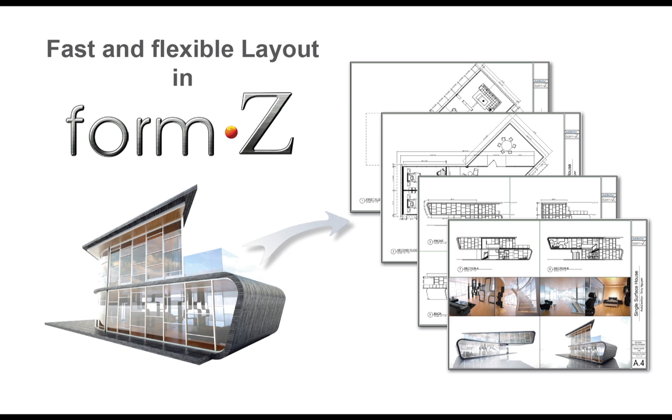In this presentation today, we'll be looking at some of the new and improved 2D layout features in Form•Z 7, which allow you to quickly and easily generate a set of 2D layout documents from your 3D models. We'll begin with this existing 3D design concept created by Tony Nguyen. This project, called the Single Surface House, consists of a single curving form that transitions from floor to ceiling while overlapping and converging between the different elevations. This 3D model should make a great example for highlighting the powerful 2D layout features in Form•Z.

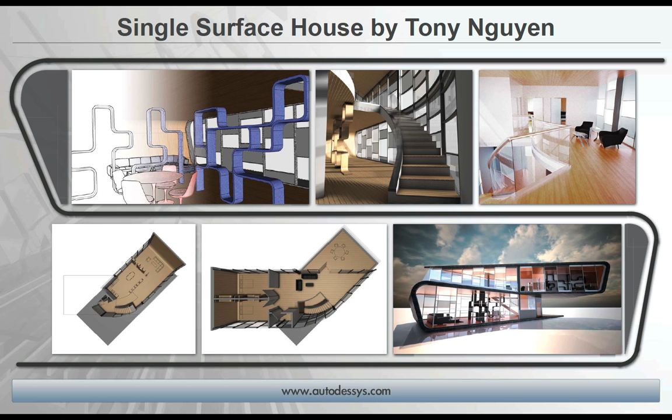It should be mentioned that your 2D layout can be linked to your 3D model, so any changes to your model are automatically updated in your layout, and your associative dimensions automatically update as your design changes. Form•Z can also automatically generate hatch patterns when you create floor plans and cross sections, saving you valuable time. Layout lets you fully annotate your design with line styles, line weights, images, graphics, and anything else you need for a complete set of 2D layout documents.

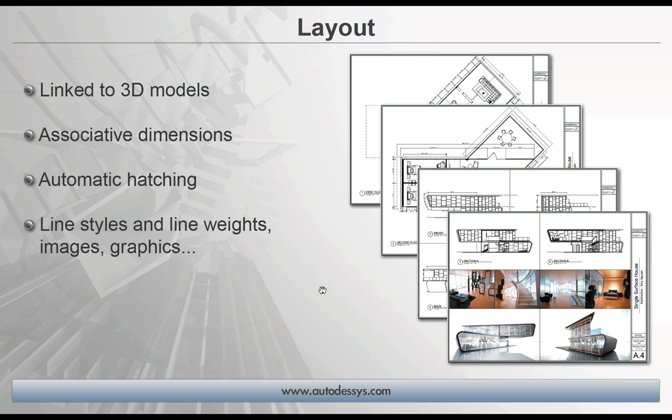So with that, let's launch Form•Z and see for yourself how easy it is to create your own 2D layout in Form•Z. We will switch over to Form•Z, and here is Tony's project, all modeled and rendered inside of Form•Z. Now, our case here is to show how easy it is to take this 3D model and convert it into a set of 2D layout documents. And here's how the process works.

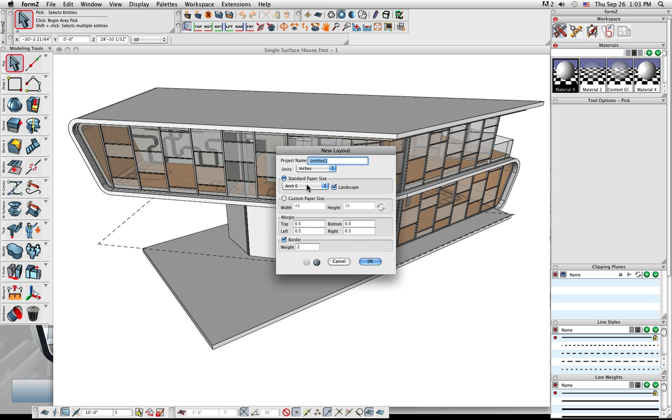Simply go to the File pull-down menu and choose the New Layout Project option. First thing you're going to do is select the size of paper that you want. There are all sorts of industry standard paper sizes you can choose from. Let's choose Architectural E size. Of course you can do metric or English systems. Click the OK button, and that starts a brand new project.

Here we have our layout space. This is a 2D world, and here's our sheet of paper. If we were to measure that sheet of paper using the measure tool, we'll see that since we chose the Architectural E size, it's 48 inches by 36 inches. There's our sheet of paper that we're going to begin to lay things out on.

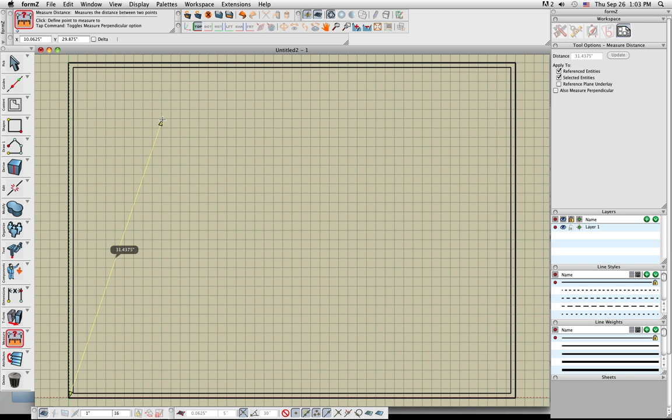Now, when we save this, you can see that if I were to save the project right now, this is a separate file which is saved as a .fml file. I can give it a name, such as, how about Single Surface House Layout. So this will be saved as a separate project file.

All right, now how do we get content in here? Well, there's all sorts of drawing tools to add lines, splines, arcs. You can add text and dimensions and all that stuff. Or you can use the content tools, which allows us to add content from 3D models into our layout space.

Let's try the frame tool. With that, we simply select the frame tool and create a frame boundary. Inside that frame boundary, we're going to link that or sync it to a 3D model. Then we can see views of a 3D model inside of that frame.

So let's load a 3D model. Let's take Tony's model here. Here's the FMZ file for that right there. Click open. And there it is.

Now, what do we want to see in that frame? Well, we can change the view. We can use one of the views that are already saved in that 3D file, or we can use some of these standard views - top, front, back, whatever we want. Let's say we want a front elevation, so I'm going to choose the front elevation option.

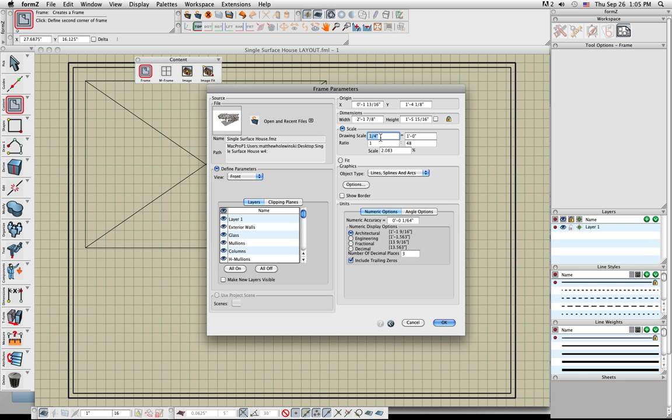We can set a scale. Let's make that 1/4 inch equals a foot scale. Click the OK button, and there we go. We now have a 2D flat representation of a front elevation of that 3D model, and it is linked with that model. So we have lines, splines, and arcs here, all in this 2D world.

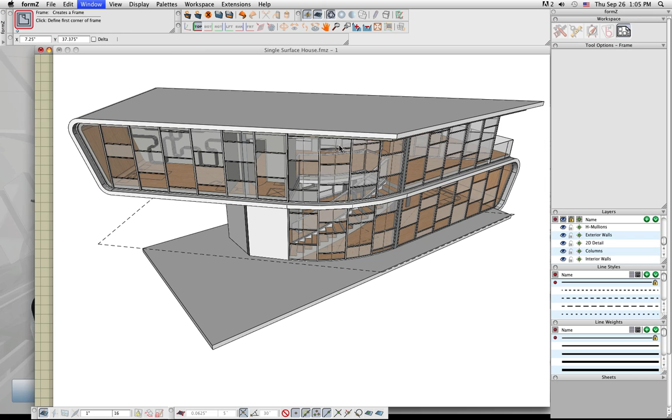Now, just to show that this is linked with the 3D model, let's make some changes to that model and see what happens in our layout space. So we go back to our FMZ file, which is our 3D model, and let's change something on here. Let's say we want to add some additional space to the second story in this room over here.

So let's make a quick modification to that. I'll go to a front view, and using the pick tool, I'll go to wireframe for just a second and window pick all the points that are in that part of our model. Now, how far do I want to move these?

Let's measure this and see what distance it is between the mullions here. And you can see if I click from here to here, it looks like it's about 14 foot 2 inches between those. So let's try that.

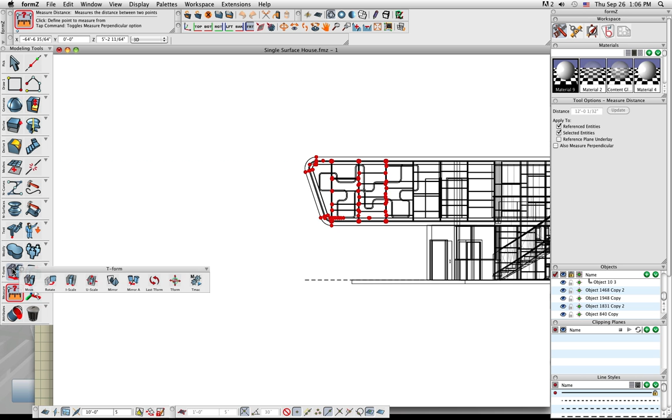Let's do a move. I'm just moving all those points, drag it over, type in 14 foot 2 inches. And there, all those points move 14 feet and 2 inches to the left. You can see everything moves, all the points move, and all the geometry reconstructs to make that change to that model. Pretty easy, huh?

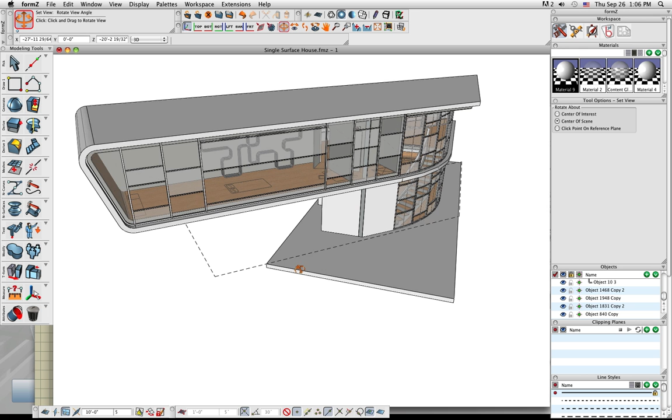All right, so let's zoom and look at this. That looks pretty good, except inside the curtain wall here, we've stretched all the glass panes and the mullions that are in there. So let's make another quick adjustment to that.

So I'll delete those mullions, which were stretched from moving those points around. So let's get rid of those.

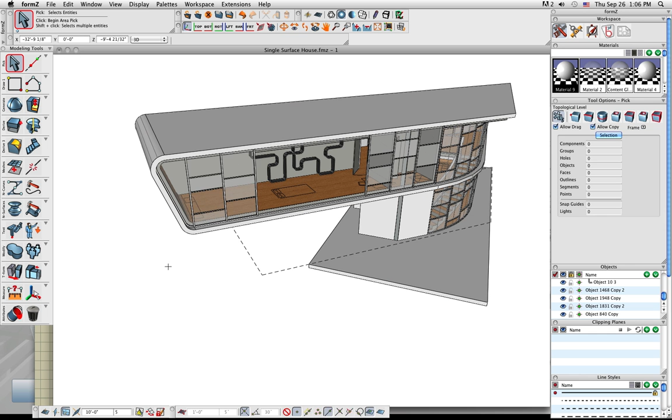And we'll just copy these mullions over here to sort of fill in that area to finish off that extended curtain wall. So I will select all of those, hold the shift key to deselect this one on the left, and then using the move tool I can do a repeat copy.

So I'll snap to the endpoint here, snap to the endpoint there, and there's our distance, and then every time I click it's going to repeat that copy operation. So there, we filled it in with our changes, and let's save our project file now.

So let's do a file save. We're saving the 3D model, which is the FMZ file. Do a file save, and let's go back to our 2D layout and see what happens.

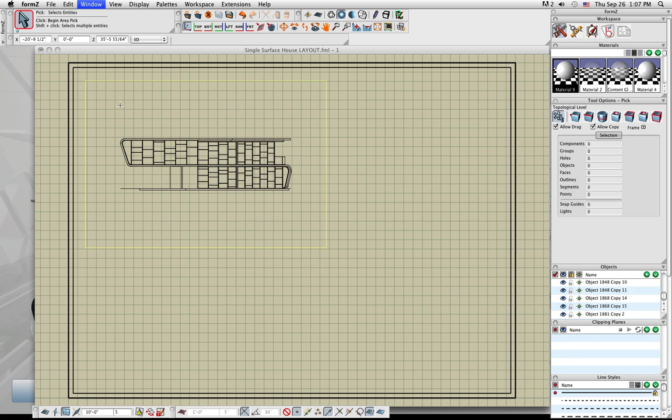So let's go to our layout file, and there we go. As soon as we bring that file back, it flags it and says, hey, that 3D model has changed. And so if you click the OK button, it'll automatically update the file for you.

And you can see that all the links will be listed here. We just have one frame, so there's one link. We can turn that sync option off if you don't want this to update with our changes, but we do want it to update, so we'll leave the check mark there.

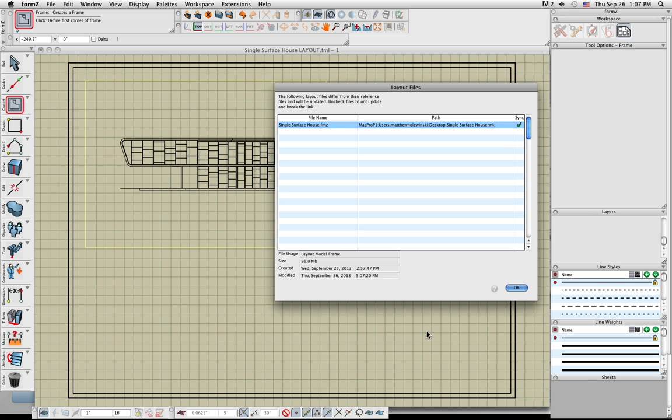And then when we click the OK button, you can see that the content, the frame content, will automatically update as that 3D model changes.

All right, so that's one way to add content into our sheets of paper here. We can also add graphic image data.

If you look at the content tools, you'll see that there's also a place image tool. So we have all sorts of rendered images that Tony did, both in the Render Zone plugin and in the Maxwell Render plugin. And let's see if we can find those.

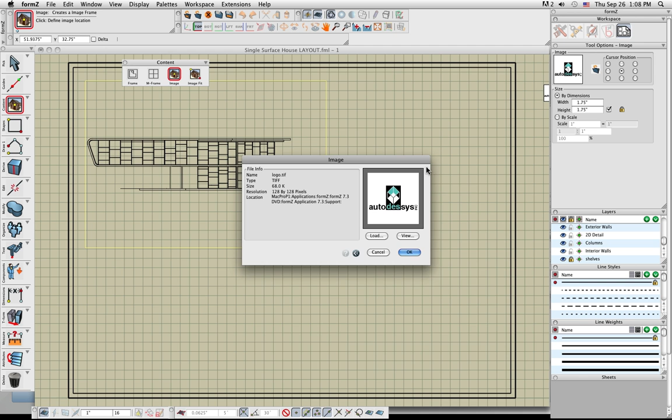I'll just say load. Any pixel image format will work. So here's some images that he rendered. Open those up, and there, we can place them right in the scene.

Now they're pretty small. We can give it any size. Just go to tool options over here on the right. Let's give it the size that we want, and we can place that graphical data inside of our layout space.

Pretty easy. All right. You can add additional sheets of paper to our layout. Look in the lower right-hand corner. There's a Sheets palette. Let's expand that.

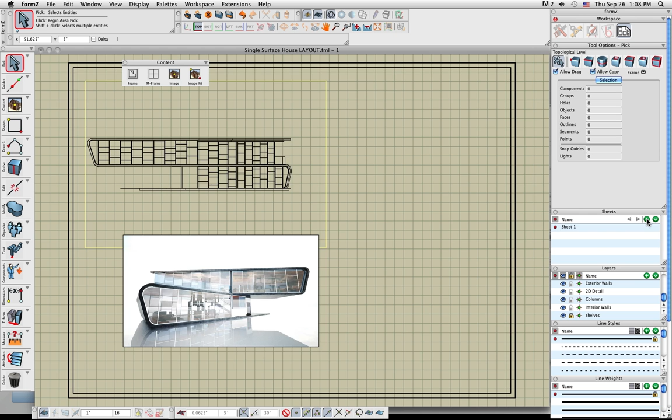There's one sheet of paper. Click the green plus button, and we add another sheet of paper. And we zoom out a little bit. You can see now there's two sheets.

Okay, let's click on sheet 2 and zoom into that one. Let's do a series of elevation views now. Now, to really speed up the layout process, there's a multi-frame tool, which allows us to lay out multiple frames simultaneously. So I will define one single boundary, and inside that boundary, I can lay out multiple frames.

So we can choose the layout options here, 2x2, 1x3, 3x3, as many as we want. Now, let's choose what we want in each of those frames. We'll have a front elevation in this one.

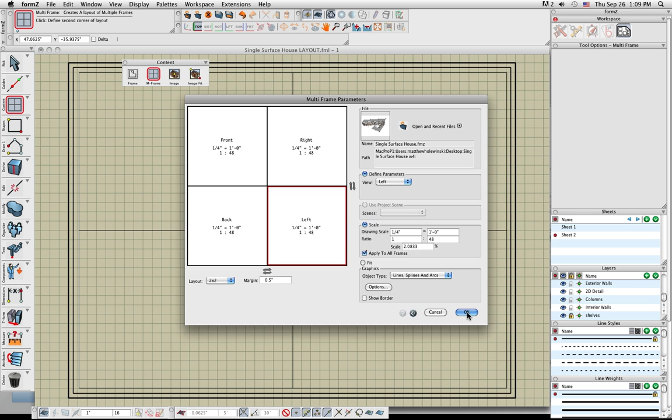Click on this one, we'll make that the back elevation, and we'll leave this as right and left. For the scale, we can set each of the scales separately for each of those, or just apply one scale for all of them. Once that's set, click the OK button, and off it goes. It'll actually generate multiple frames for you, so that'll help speed up that layout process.

Now, looking at these elevations, I see we still have our changes in there. So I'm going to go back and change that model back to the way he had it. Let's go ahead and update that. Let's go back to our 3D model, and I'm going to undo the changes that I made to his model. Let's go back, undo a few steps. There we go. So now we're back to the original model that was there.

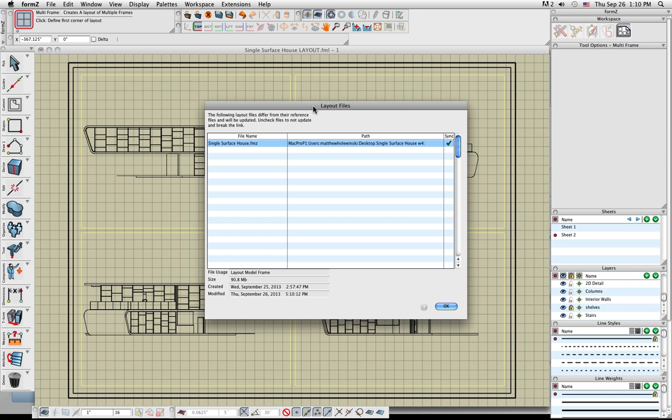And I'll resave the file. Let's go back to our layout space, and we'll see that that should automatically update for us. Once again, as we go back into that project file, it recognizes that there is a change to that 3D model, and it'll prompt us to accept those changes if we want. So click OK, and you'll see once again we'll automatically sync our 2D layout with our 3D model. So now all of our frames are set back to the original model. There we go. All right.

Next, let's create some floor plans. There's all sorts of different ways that we can do floor plans and cross sections of our 3D model.

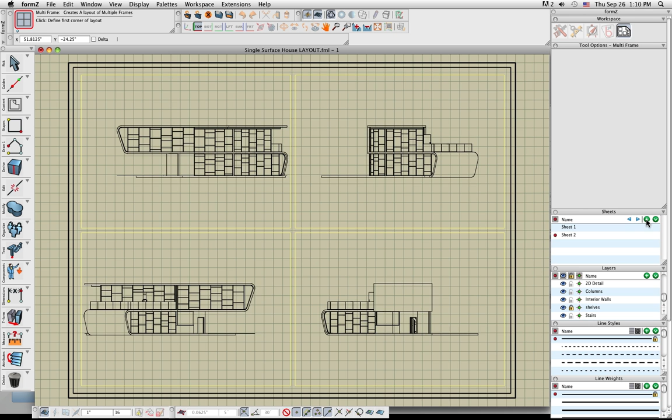Let's add an additional sheet. Click the green plus button. Here's our third sheet of paper. I'm going to use the frame tool, and I'm going to make one large frame that takes up this whole sheet of paper. We'll use that for our first floor plan, and we'll use the same model. Now, I should mention that you can link different 3D models inside your layout space, but we're just going to use the same model here.

Let's do the floor plan option. So instead of a view -- front, right, back -- use the floor plan option and give it an elevation. Let's give it 5 feet. Okay, let's give it a larger scale. Instead of a 1/4 inch scale, let's make that 1/2 inch equals a foot. Click the OK button, and there's our first floor plan.

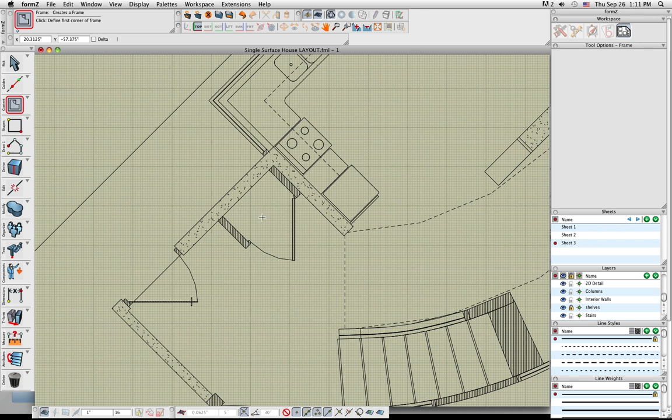Now, notice I didn't have to do anything in the 3D model. I can just tell it where I want to cut the cross section, and it'll automatically generate a 2D flat layout first floor plan, which consists of a series of flat 2D lines, splines, and arcs. Also notice that hatching and line styles are automatically carried over from the 3D model, so the cross section automatically created those hatch patterns for me. That's a real time saver. And all the line style information I added in the 3D model is also incorporated in these layout frames. I'll talk more about this hatching stuff in just a little bit.

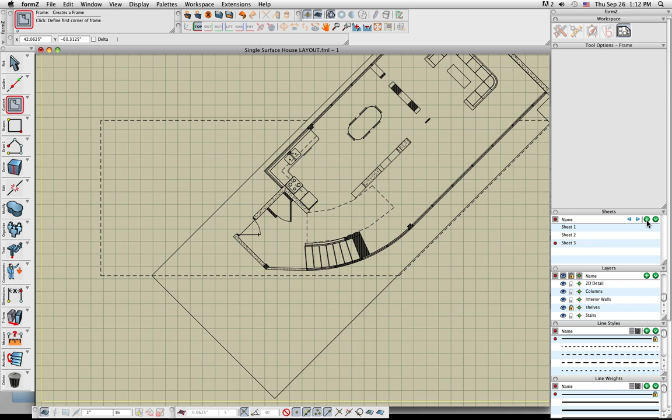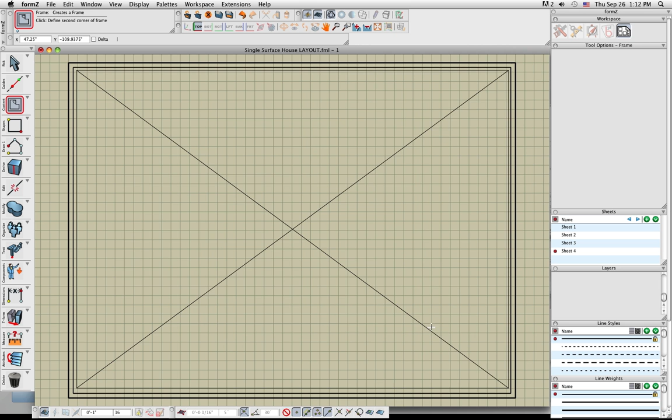Before we do that though, let's create the second story floor plan. I'll click the green plus button, add another sheet of paper, and let's do another frame. Let's use pretty much the same process: make a frame, choose the model, choose the floor plan option. Let's choose 16 feet, and let's give it a scale of 1/2 inch equals a foot. Alright, click OK, and now we should have our second story floor plan. That quick and easy, huh?

Now, I should mention there are other ways of creating floor plans and cross sections besides the floor plan option. There's also an option where you can actually use the clipping planes that you define in your 3D model. Those are the non-destructive dynamic planes in your 3D model, and you can use those as the section plane for your layout.

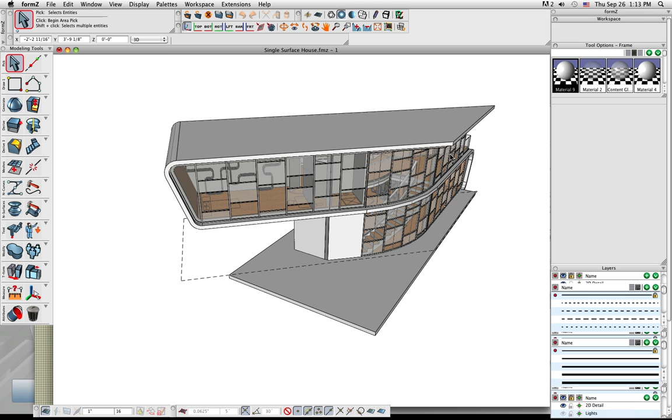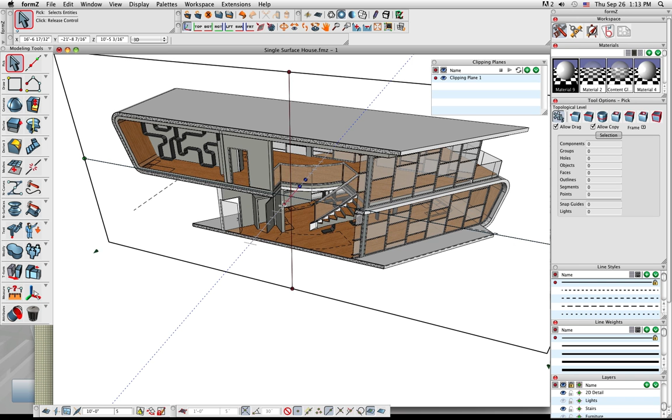So let's see how that works. What I'll do is go back to our 3D model, and I'm going to create some clipping planes through our model. Here's the clipping planes palette right here. Click the green plus button, and there we have a non-destructive dynamic plane that we can visually cut through our model. Now it's not really creating a true section cut, it's just a visualization tool that allows us to view our model through that plane. And I can move that anywhere that I want. Okay, I can turn that one off. I can create as many as I want, so let's add another one.

I'm going to create a clipping plane that's rotated and moved so it's off at the angle of the side of the building over here. Move that right about there. There we go. Alright, you can have multiple planes turned on at the same time.

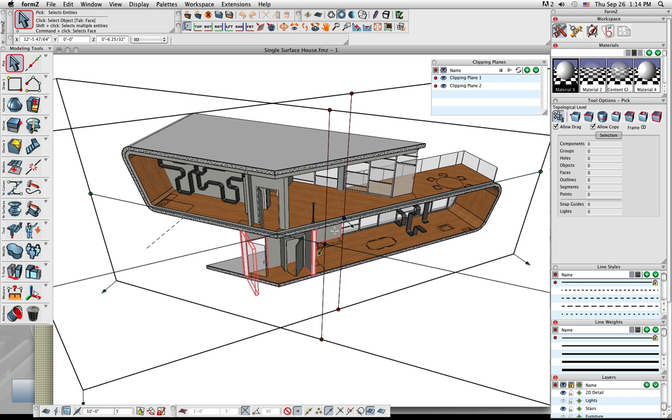Now at this point it's sort of a modeling tool. It's a visualization tool that lets us look inside of our building, and if we want we can actually work in this mode. So you can see with those planes turned on, I can still go in and use the modeling tools and work inside of that clipped model.

Now I'm going to take the second one here. I'm going to pull it out just a little bit further, because let's say I'm going to use this in my 2D layout mode, and I want my 2D layout cross section to be right about there. There we go, right there.

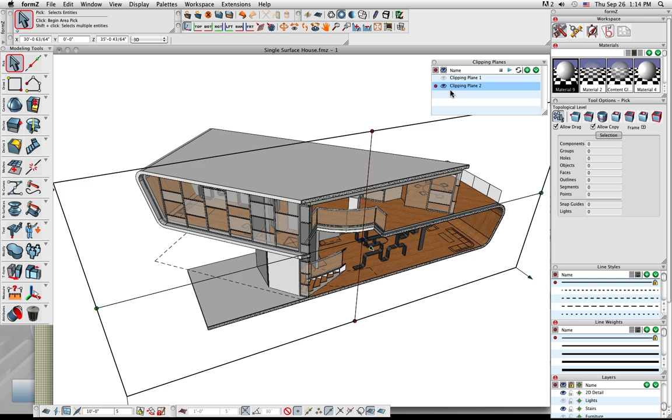So now what I'm going to do is turn these off, and it's going to help if I name these. You don't have to name them, but I like to name them so I can keep track of all these planes I have in here. I'm going to call this section A, and I'm going to call this clipping plane section B. Alright, there we go.

So now let's go back to our layout. What I'm going to do is use these planes in this layout space. Let's go back to sheet number 1.

And if we want to modify any of the parameters inside of that frame, we can just simply use the pick tool, right click on the yellow frame boundary, and choose the parameters option. That lets me adjust any of the parameters - I can change the view, the scale, turn layers on and off, whatever I want.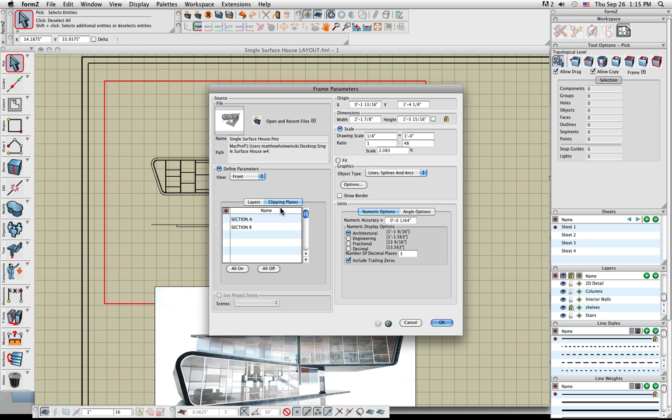I'm going to make one change. I'm going to select the clipping planes tab, and you can see the clipping planes from that 3D model are listed there. So let's turn on section A, click OK, and that will automatically update and regenerate that frame with that clipping plane turned on. So there is our section A cross section, defined from the clipping planes that were defined in the 3D model itself.

Now another variation of that would be to create the frame, something like that, and then instead of choosing a view, I'm going to choose the section option. What the section option does is I select a clipping plane that's in the model, and my view will automatically be perpendicular to that clipping plane.

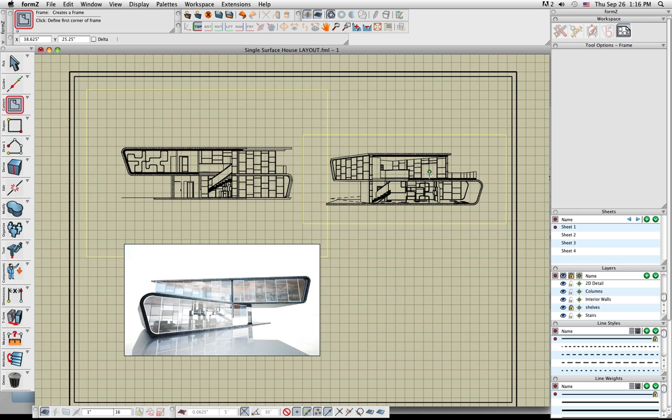So I click OK, and I can see I didn't have to define whether I'm looking at the front or the right side. All I have to do is pick that clipping plane, and it automatically aligns the view in that frame perpendicular to that clipping plane. That's a nice and fast, easy way to make a section B cross section there.

Now that's a lot of different ways of adding content to our layout sheets. I should mention this briefly: if I go to File, Import, if you have information from other programs, you can import using the Add To Project option. Notice we support all these different industry standard 3D formats - you can import stuff from a DWG file, AutoCAD file, DXF, and bring that right into the layout mode here.

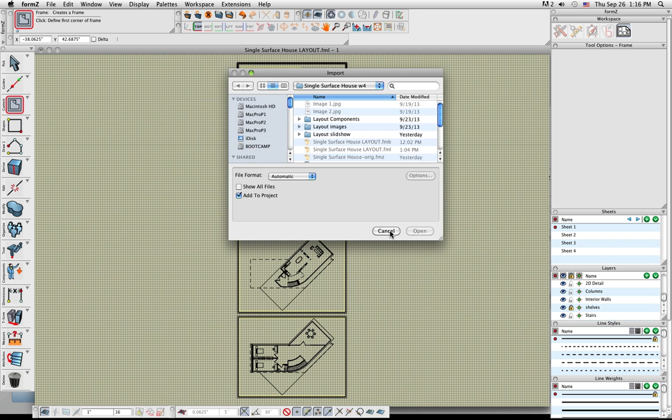Now I probably should mention this too, just a little side note. If you export to any of these formats, I can export to an AutoCAD DWG or DXF file, and what you see here will all export out as lines, splines, arcs, the same way you see it here into that other file. So you can bring in stuff from other programs and also send this to other programs. That's about it for being able to add content.

There's other things I can show here, but let's move on. What I'd like to do now is look at ways that we can adjust the content that is there. We already briefly looked at that - when we looked at sheet number 1, you saw that we can right-click on a frame and choose the parameters option, which lets us change the different parameters of that view.

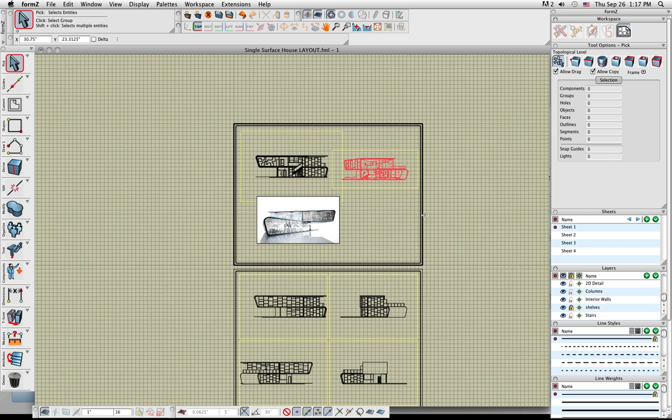So let's expand on that a little bit. Let's go to sheet number 4. Let's say I want to create some kind of exploded detail of one of the rooms here, maybe annotate some special details and have a blown up scale of some part or section of this floor plan.

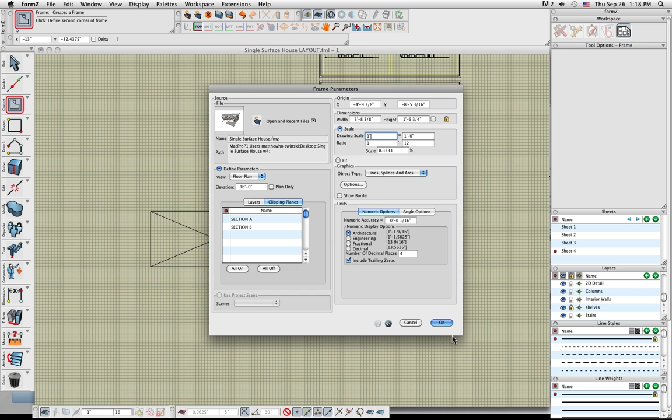One technique I like to use is I'll create a frame, and I can create the frame anywhere - it doesn't have to be inside the actual sheets of paper. In that frame, I'm going to do a floor plan at 16 feet, same floor plan for the second story, but give it a really large scale so we're zoomed into that part of the model. Let's go at 1 inch equals a foot, click OK, and there we get that same second story floor plan, but at a much larger scale.

Now let's look at what we can do inside of these frames. We can move the content that is inside the frames. Now I have some layers that are locked here, let's unlock that. So with the move itself option, I can drag that frame contents. Let's move that over here. And there we go - now of course you can see only the part of the model that's inside of that frame boundary.

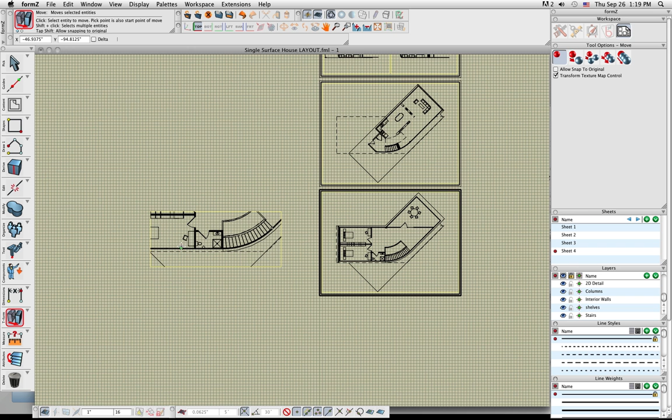We can also adjust the size of that frame. So if I have the pick tool active, I can right click on the frame, show controls, and that gives us control handles that let us adjust the size of the frame itself.

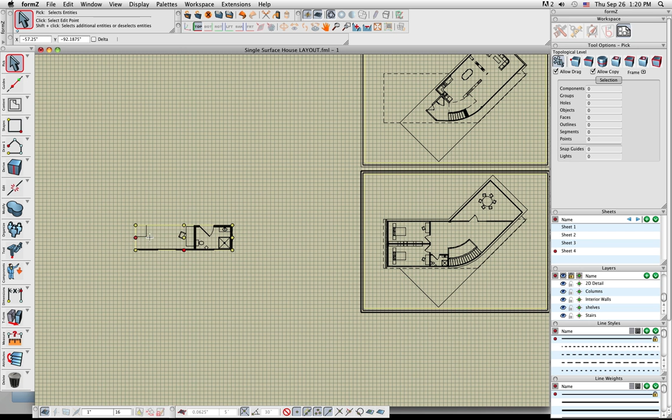I can also snap it right to the entities that are inside of that frame. So let's snap it to the sides of the wall here. I'm going to shrink the frame down so it matches the outside boundary of just that one room, which is shown at a larger scale, at 1 inch equals a foot.

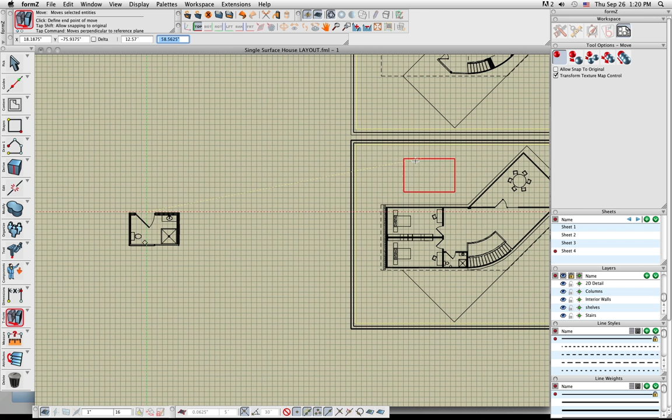When I'm done changing the size of the frame, I can right click on it again and turn the show controls off. I can also move the frame itself - if I use move and don't click on the frame contents, but click on the yellow frame, now I'm moving just the frame. So I can drag that onto any page or sheet of paper and place it wherever I want inside my layout space. And there - now we have an exploded view of that room at a much larger scale.

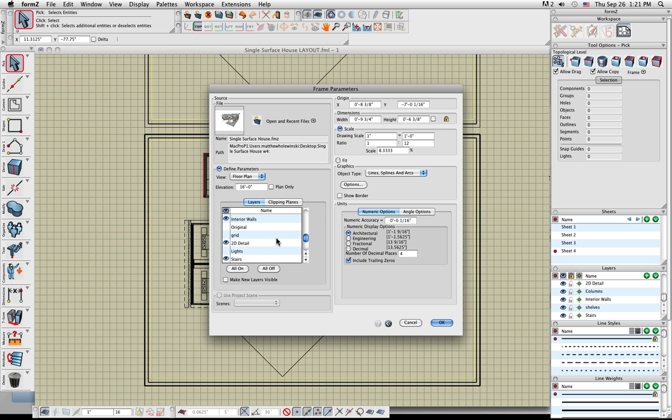Now a couple other things about how you can change and adjust the frame parameters: if I right click on that and choose the parameters option, a very important thing is not only can you change the view and scale, but also you can change layers. You can go through and look at the layers in that 3D model, turn on or off the layer so you see just the content you want inside of that frame.

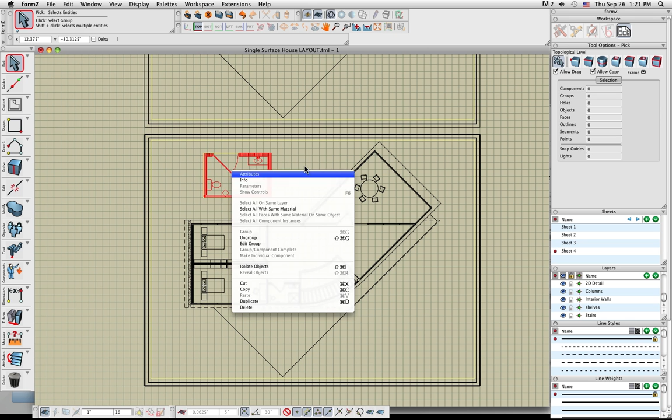Now something else we can do is break that link with the actual model by right clicking on that frame contents - you see it all highlights as a single group. If I right click on that, I can choose the ungroup option. That will break the link with the 3D model, so if the 3D model changes, your entities will not change here, and you end up with really just a bunch of lines, splines, and arcs that represent that current state of the frame.

I probably should mention this too as a side note - if you go to the File pull down, go into Project Info, and look at the Linked Files tab, you can see all of the frame information and the files that are associated, and you can link or unlink those here also. So there's a couple different ways that you can actually control whether you're staying in sync with that 3D model for each of those views or each of the frames.

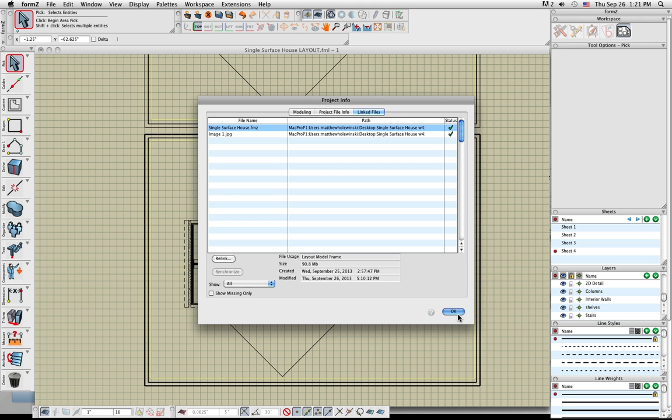Alright, making some progress here. So there's all sorts of different ways that we can adjust that frame content. The next area I'd like to talk about is let's annotate the project.

We've seen how you can add content. We see how you can adjust the content that's there. Now let's add some dimensions and hatch patterns and text and things like that. So all sorts of dimensioning tools in the layout mode.

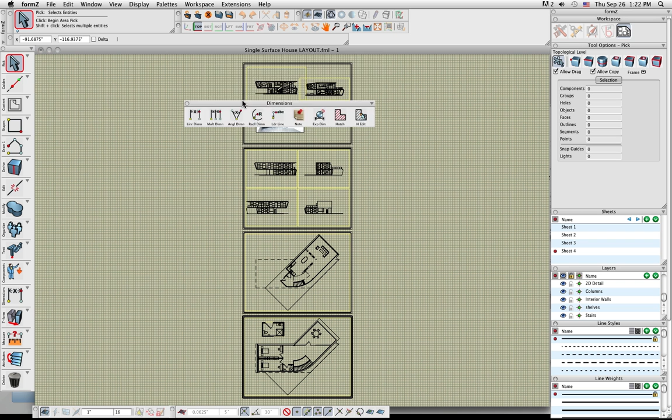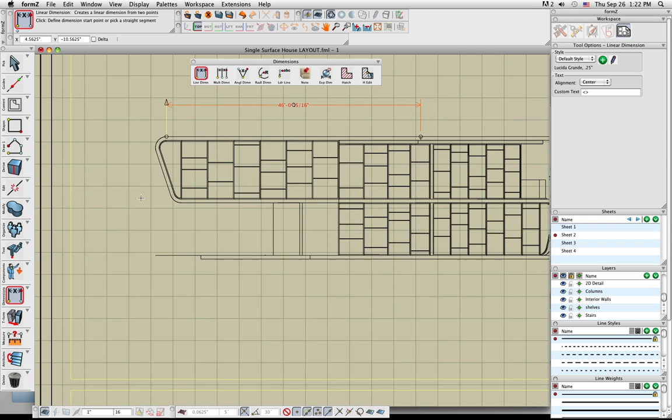What I'm going to do is zoom into sheet number 2, and let's add a few dimensions maybe to this front elevation view. When I select the linear dimension tool, I can actually snap to specific locations on that front elevation view. And if I snap to the proper positions, it will link it back as an associative dimension to that model, so that if the model changes, not only will the frame contents change, but also the associative dimension information will change also.

Alright, let's do some multiple dimensions. We'll do an ordinate dimension. We can snap to the bottom ground plane here, snap to that part, snap to that part. And then if I drag that out, we can quickly add a series of elevation dimensions to that.

Now here's another neat thing. If I were to add a radial dimension to that, you can see that when I move it over any arcs that are in that front plan elevation, it's a true arc. And so when you bring in these elevational views or any frame contents, it'll actually keep it as splines and arcs that you can actually add radius or diameter values to that.

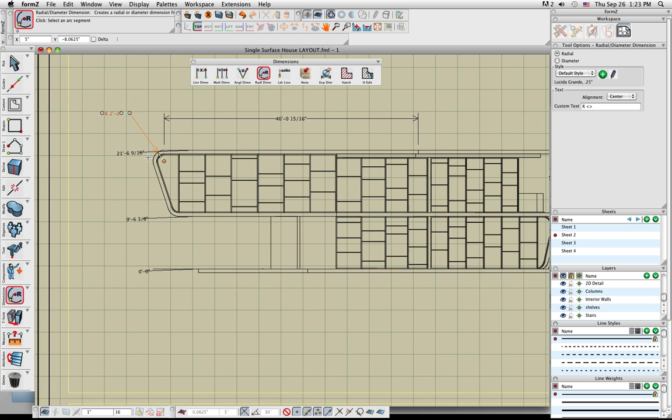Okay, now I should mention, this is one of the new things that's in 7.3. I'll show you, if you right click on that frame, show the parameters option, you can see that there's the object type. This is, like I said, a new feature that's in 7.3, so if you're using previous versions of 7, you won't see these options there.

So make sure you update to version 7.3. And with that, you can see that you can actually create the graphic entities that are inside the frame as just a bunch of lines. That's how it was with previous versions. But now we have new options, which is polylines, meaning it'll make a series of connected lines, or you can choose the line, splines, and arcs option, which will actually generate lines.

Curved sections will be spline curves, and arc and circle information will come in as true arcs that you can actually dimension from the arc information that is there. Now that is the default setting, so if you don't change anything, it'll automatically come in as lines, splines, and arcs.

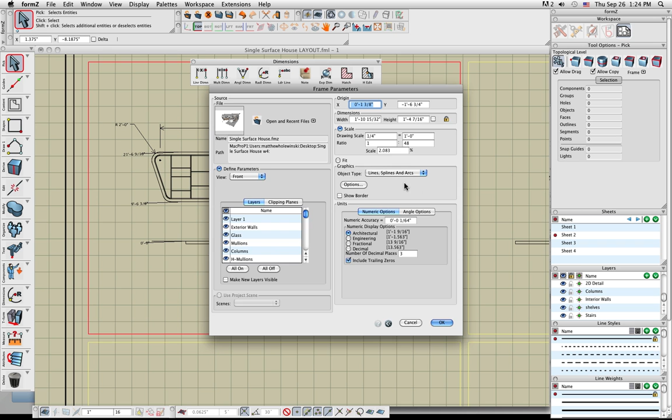Okay, let's talk briefly about being able to adjust your dimension styles. So if I were to select that dimension, you can see if I look at the parameters tab over here in the upper right hand corner, you can see that it's automatically set to the default style.

If you want to edit that, choose the edit styles. And then inside of here, the default style can't be changed. That's locked. So you always have that there. If you want to adjust anything, you have to create your own styles.

Click on the green plus button. Let's create a new style. Let's call it Matt's Dim Style 1. Click a blank area. There you go.

Now we can adjust anything here. Change the arrow, the type of arrow, the size, the display accuracy. We can change that to maybe an 1/8 inch. Change your text font, whatever you want. Click OK, and you can see that that dimension will now update to the new personal style that you created yourself.

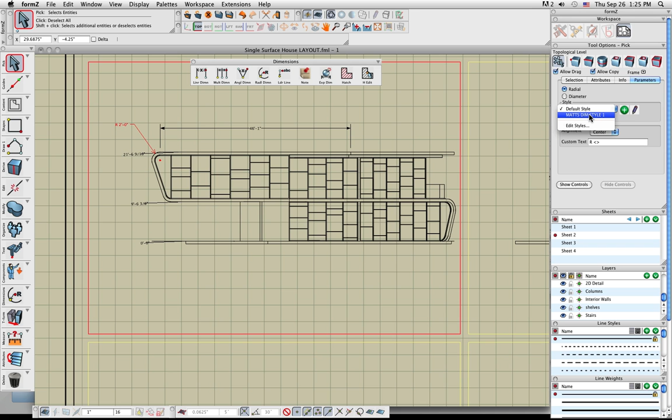If you want to change other dimensions in the project to a different style, just simply select that dimension. And if you look at the style list here, it'll list all the styles that are currently in that project. So we can change that to that style that I just created.

Now you can load styles from other projects. Let's see where that's at. If I go to the Edit Styles option, you can see that you can load the dimension styles from some other form Z file. So you have some standard ones that you use every time.

You can always load those in and set those. You can even set those up in a template file too if you want to use those all the time for each of your projects.

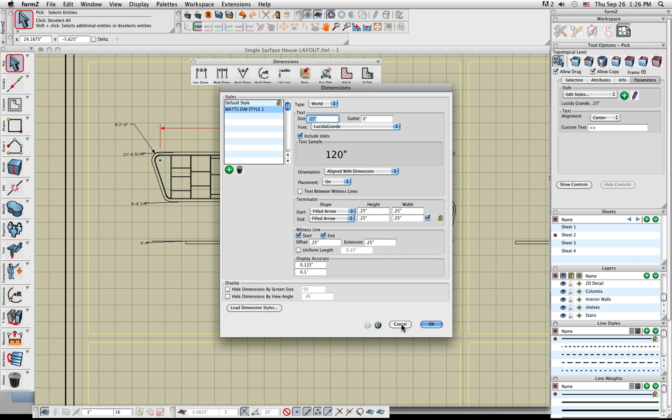All right, now I should mention also these dimensions don't have to be associated to object. For example, if I move up here to this graphical image that I placed in this layout, I can add a linear dimension. I'll just click right here, and I'll click right there. And I'm not clicking to any 3D geometry.

I'm just clicking on my piece of paper that's on top of that image there, so I can place those anywhere. It's not associated to anything, just a plain dimension laying on that sheet of paper.

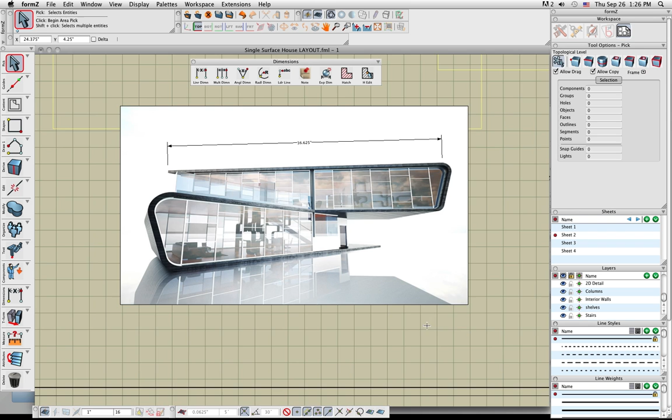Notice that I'm getting the paper space size. When you associate a dimension to the frame entities, it's looking at the true size of the model, so it'll give you the true model space size. If you're just clicking them anywhere, it gives you just the actual paper space size, because it doesn't have any model to link to.

So what we can do is click on that dimension, and if you look up here in the parameters, we can create some custom text. The less-than greater-than sign means it'll use the actual dimension that's there. I can get rid of that and just type in 40 feet, 0 inches. There we go, so I can automatically update it that way.

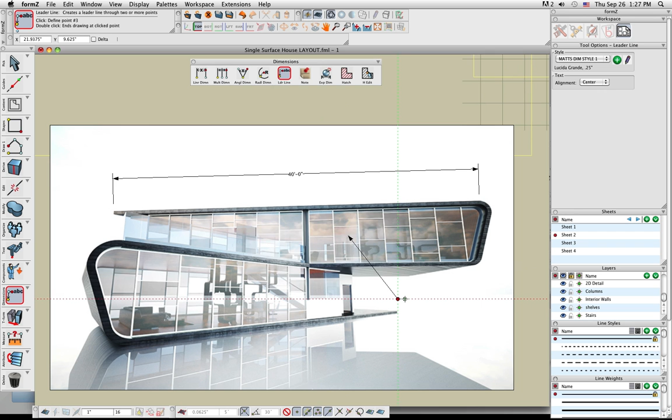Let's add a leader. Let's say we want to spec out the type of glass that's going to be used for this project, so let's type in insulated double panel glass. Let's try that for now—we can always change this later on.

There you go, and I think you get the idea of how easy it is to quickly annotate your model with both associative and non-associative types of dimensions.

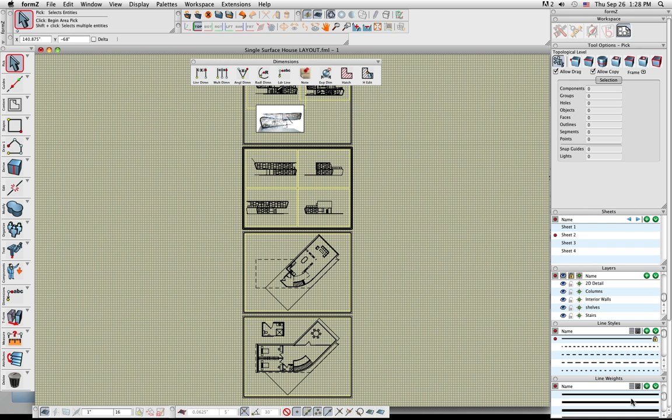I should mention too that when you're in this layout mode, there's line styles, line weights—we can add those to the line entities. There's a hatch tool to add hatching information, but a real time saver is, like I mentioned earlier, that cross section: the hatching information and line styles are automatically brought in from the 3D model. So if you add any of that in the 3D model, you don't have to redo it here in the layout space. Let's talk a little bit about how we can do that for ourselves on our own projects.

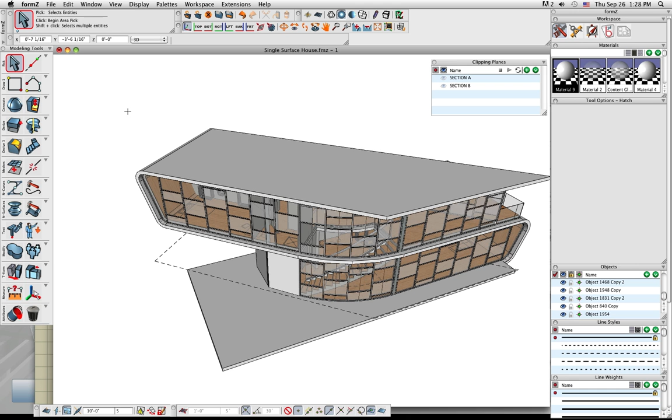Well, let's go back to our 3D model and look at that section B plane that I created earlier. I turn that on, and you can see that when I move that dynamic clipping plane, that cross section is automatically generating that hatch pattern. How is it doing that? I'll show you—let's turn the section B off.

If I were to pick any object, let's pick this object, which is that serpentine flowing floor ceiling shape there, and look in the tool options on the right, I'm going to click on the Attributes tab. You can see one of the attributes for the object is the cross-section attributes, and we can control how the cross-sections for that object are created by changing these different parameters. One of them is the hatch pattern.

Normally this is off, so if you want a cross-section hatch pattern, you need to turn this on, and then you can drag and drop any hatch pattern into that box. Here's a hatch palette, has all sorts of hatch patterns that come with form Z, and you can load your own hatch patterns. We support the industry standard .pat files, so if you need to load any custom libraries that you have, you can load any .pat file, and you can download those from the internet—they're all industry standard files. See one that you like, just drag and drop it into here, and it'll take on the cross-section attributes.

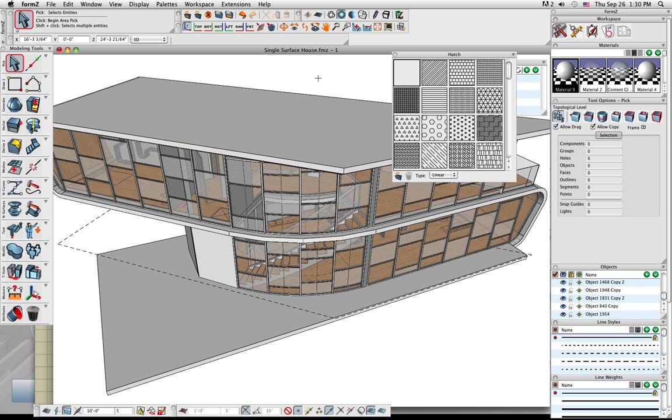Now, you can also add hatch patterns to objects or faces of objects in the 3D modeling window, and those will also carry over into the 2D layout space.

So let's try that. Let's just grab one of these hatch patterns and drag and drop it onto this wall panel. Now if you want to apply it to just a single face, you can hold down the Command key on Mac or Control key on Windows, then when you drag and drop it, it's going to apply it to just one face of the object.

There's a hatch tool, which lets you not only place the hatches—if you don't want to use drag and drop, you can use the hatch tool—and there's a hatch edit tool also. If I click on that hatched object, you can see we get this little widget that lets us dynamically control the hatch pattern that's on there.

So I can move it up, move it down, rotate it, and if you look in tool options over here, you can see there's all sorts of numeric parameters to control the scale and size of that hatch pattern on that object.

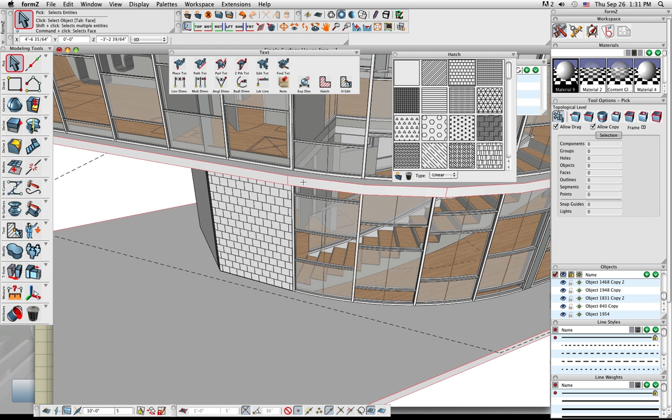Now also notice in this suite of tools that we have here, along with the hatch, there's also 3D dimensioning tools. We can add 3D dimensions in our model to annotate it in 3D, and if we have those dimensions on, when we bring it into layout, we can actually have those dimensions show up in the layout space also.

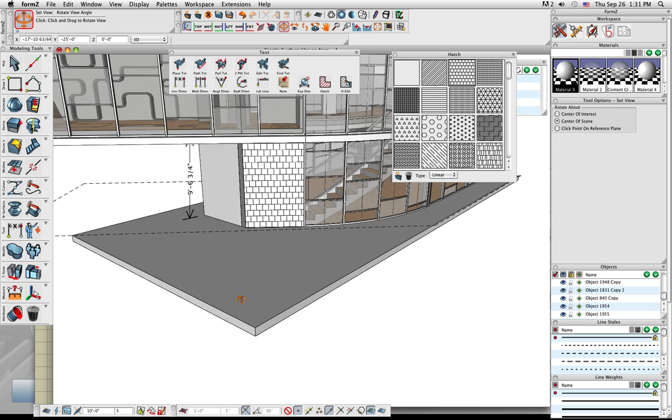So if we were to spin this around, let's just add a 3D dimension somewhere. How about right here? Snap to the endpoint here, snap to the endpoint there, drag that out just a little bit. There we go. And there's a 3D associative dimension that's attached to that 3D geometry that we can change the model, and that dimensional information will update with it.

Now, if you want to see what this will look like in layout space, we can actually preview it here. We can maybe turn the section plane on. We got our hatch pattern there. We got dimensions, line styles. You can see there's line styles here in the 3D world also.

If you want to change those, we can simply do something like this. Go in and just drag the line style that you want. Drag and drop it onto the entity. Now that takes on a different line style.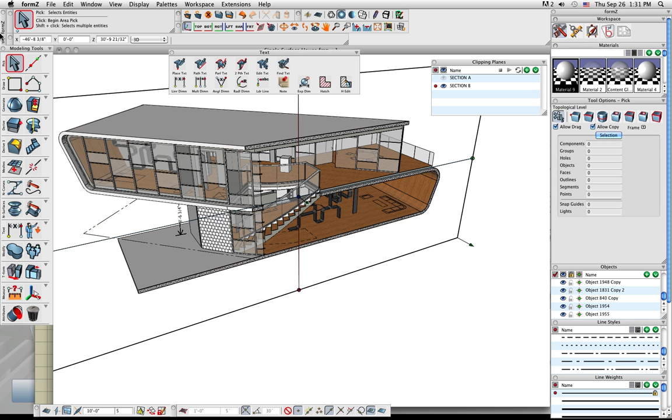So we changed all this stuff, and if you do a hidden line rendering here, in the display options up here, do a hidden line, we're sort of vectorizing, we're doing a vector rendering of our scene. You can see that all that stuff is represented in a vector rendering also. So we have the cross-section hatch pattern, we have the hatch pattern assigned to objects, we have the 3D dimensions and line styles that all show up in your hidden line process.

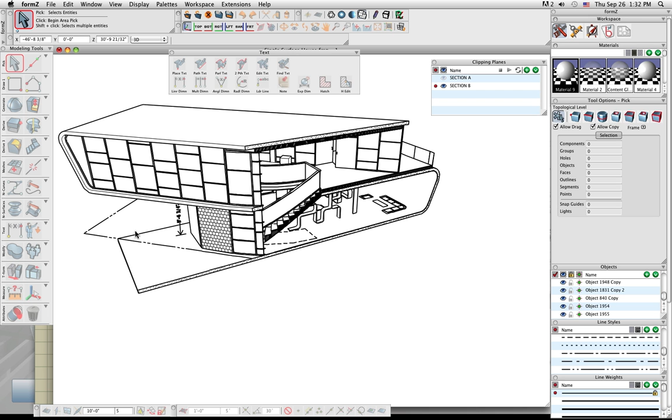You can take the image as is here and save it, or we can actually use this information in our layout space. Let's go ahead and do that. Let's go back to our layout space.

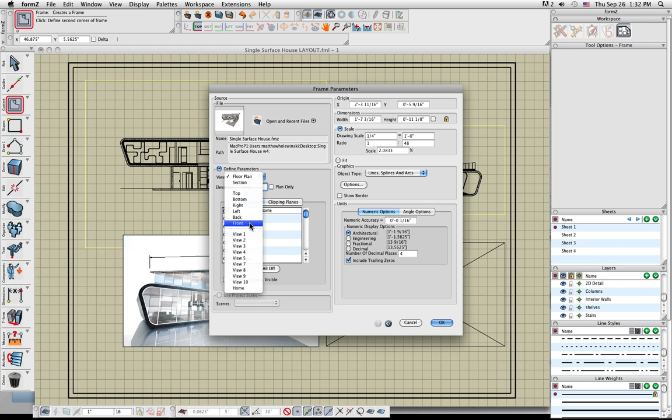And tell you what, let's create one more view and see how all that stuff looks when we bring it into the layout world here. Let's do a frame. And I'm going to create a frame right here. And let's try a 3D view. Let's do this home view here that I saved. And instead of a scale, let's just tell it to fit.

We can turn the clipping plane section B on. We can make sure it's lines, splines, and arcs. And also notice if I click this options button, you can see that we do have additional options to control how that's going to be brought in.

So we can turn the show line styles on or off. If you don't want to bring in the line styles and line weights from the 3D, we can turn that off. Now here's another option we can change too.

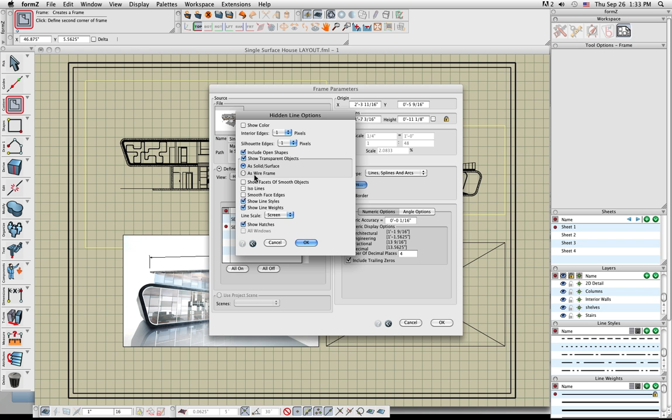What if you have transparent objects? The hidden line process by default will show the glass panels as a solid opaque surface, so you won't be able to see behind those. If you want to see through the glass, you can turn on the show transparent objects as wireframe, and then when we process that view, we click OK.

We're going to generate a 3D view with the hatch patterns and dimensions and line styles and transparent objects and all sorts of good stuff that you can play with to get just the exact view you want for that model. And there it is. There's a nice little cross-section view.

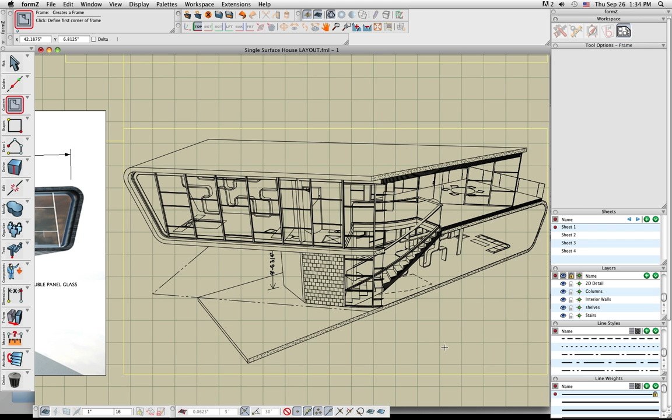Now this is a 2D flat representation that consists of a series of lines, splines, and arcs. And that's how easy it is to quickly create a 2D layout from your 3D models in formZ.

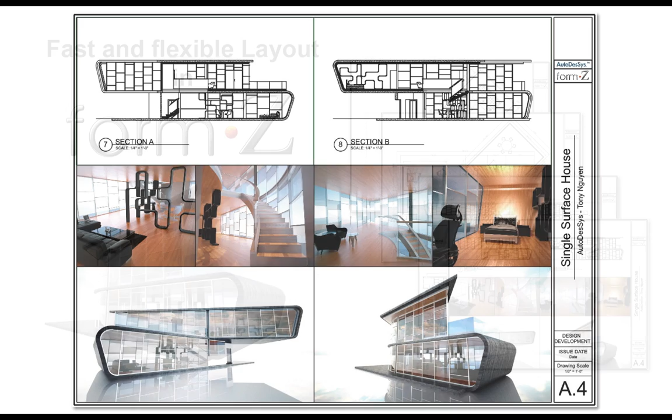And here's sort of a layout sheet that was done with a collage of both cross sections, imported some image maps, and just arranged that any way that you want. And this concludes the formZ Layout webinar.